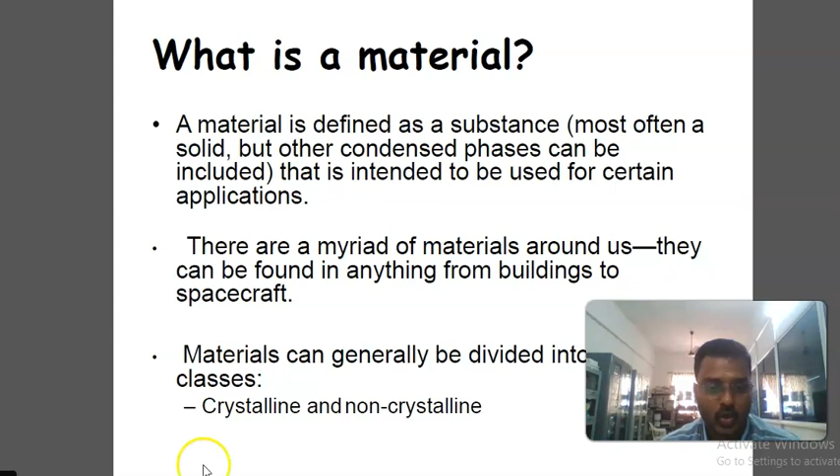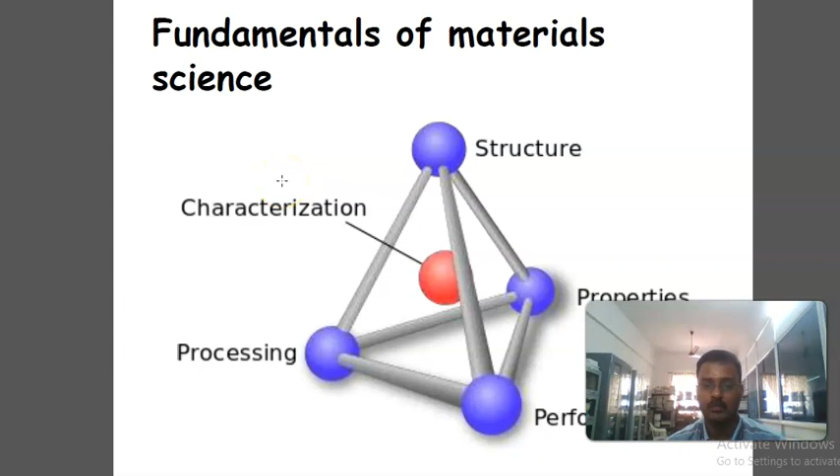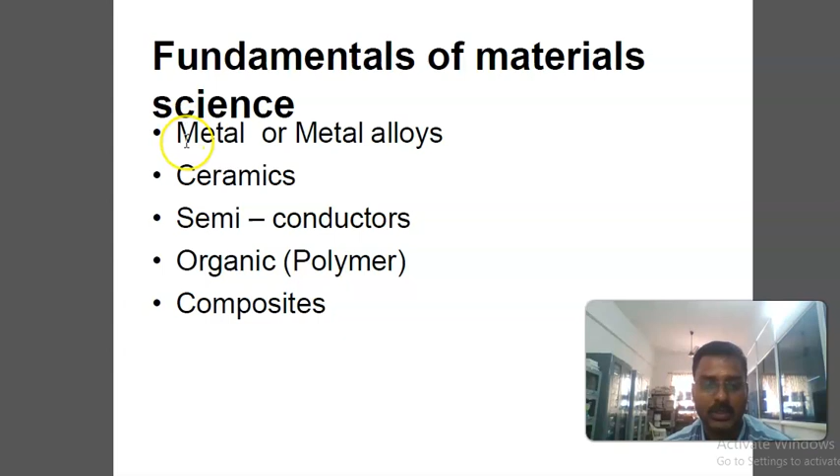Fundamentals of material science include structure, properties, performance, processing, and characterization. These are the fundamentals of materials. The fundamental categories of material science are metals or metal alloys, ceramics, semiconductors, organic or polymers, and composites.

Metal or metal alloys: the study of metal alloys is a significant part of material science. Of all the metallic alloys in use today, steel, stainless steel, cast iron, and tool steel alloys make up the largest proportions, both by quantity and commercial value. Iron alloyed with various proportions of carbon gives low, mid, and high carbon steels.

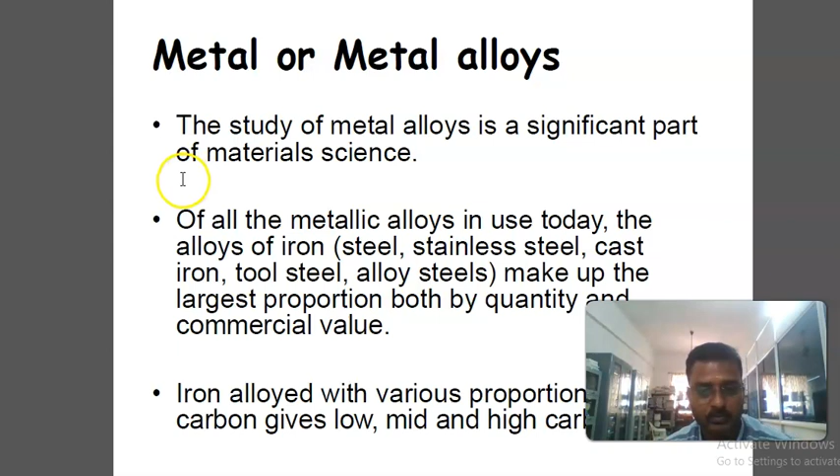An iron-carbon alloy is only considered steel if the carbon level is between 0.01% and 2%. For steels, the hardness and tensile strength are related to the amount of carbon present, with increasing carbon levels leading to lower ductility and toughness. Heat treatment processes such as quenching and tempering can significantly change these properties.

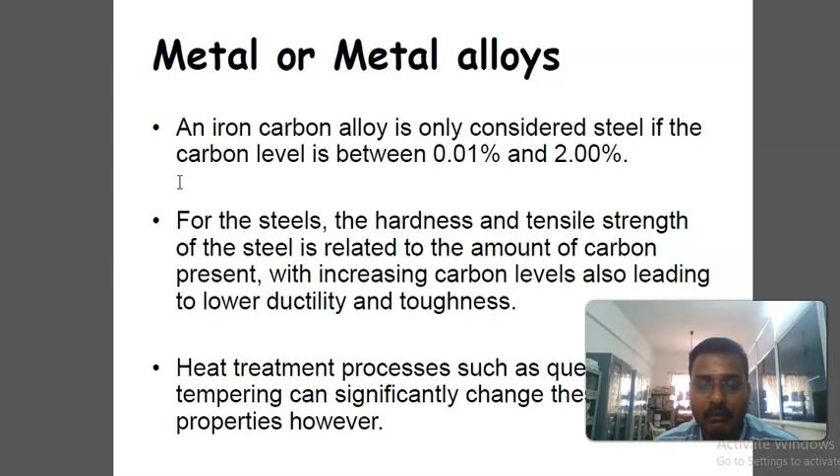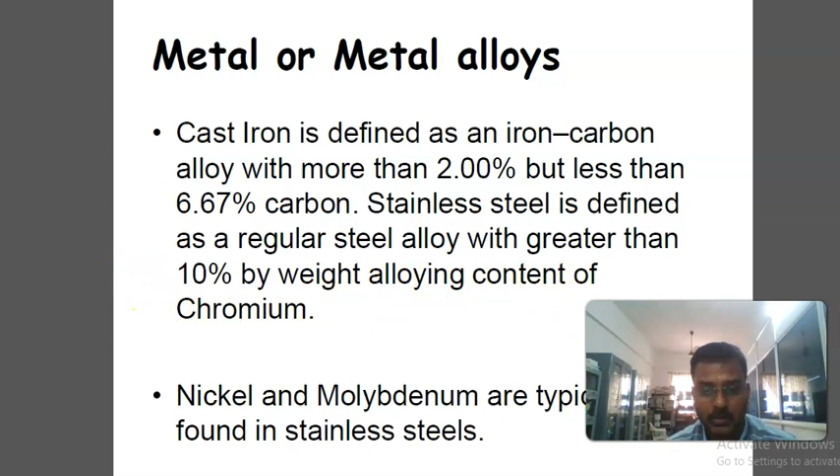This is about metal or metal alloys. Cast iron is defined as an iron-carbon alloy with more than 2% but less than 6.7% carbon. Stainless steel is defined as a regular steel alloy with greater than 10% by weight chromium content. Nickel and molybdenum are typically also found in stainless steel.

These are some of the metal examples. Ceramics are among the most brittle materials. Many have seen ceramics like tiles, wash basins, and many equipments, and also cooking utensils like tumblers and bowls made up of ceramics.

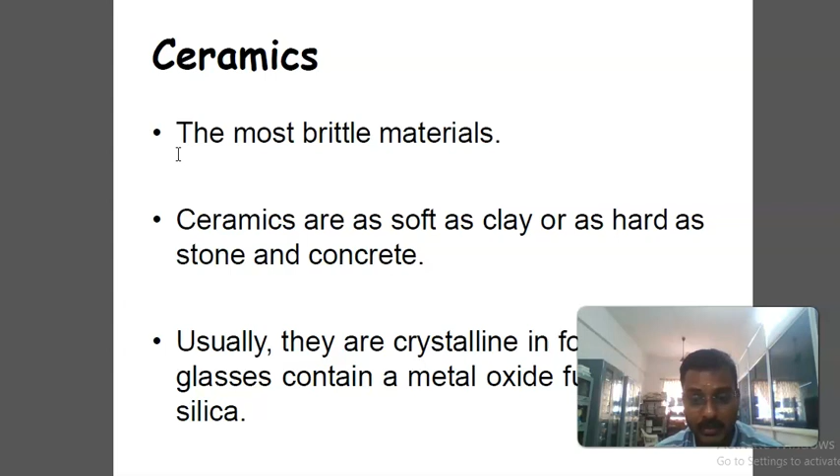Ceramics can be as soft as clay or as hard as stone or concrete. Usually they are in crystalline form. Most glasses contain metal oxide fused with silica. This is about ceramics.

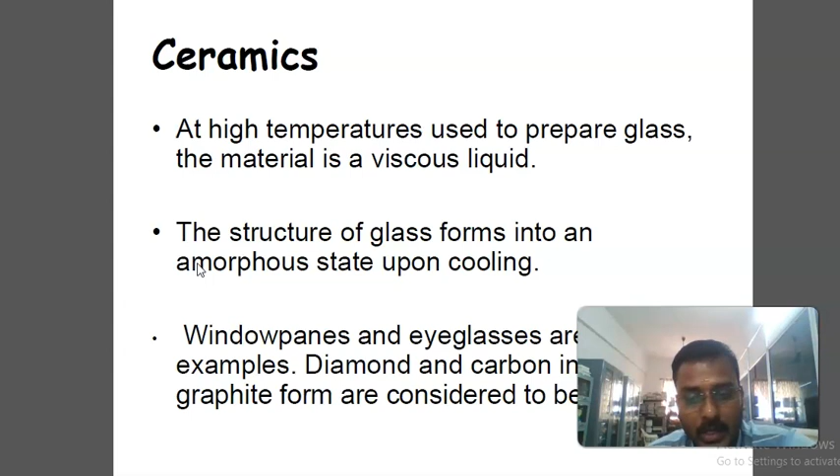At high temperatures used to prepare glasses, the material is a viscous liquid. The structure of glass forms into an amorphous state upon cooling. Window panes and eyeglasses are important examples. Diamond and carbon in its graphite form are also considered to be ceramics.

This is about ceramics. Next is semiconductors. Semiconductor materials have electrical conductivity falling between that of a conductor such as copper and an insulator such as glass. Semiconductors are the foundations of modern electronics.

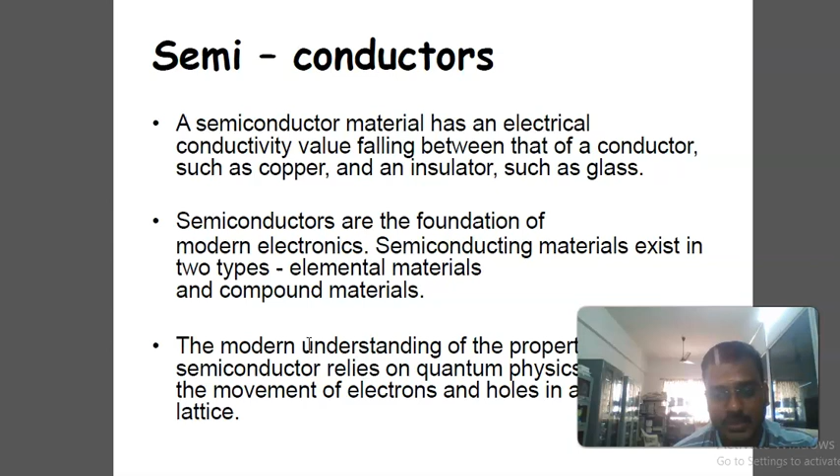Semiconducting materials exist in two types: element material and compound material, where the modern understanding of the properties of semiconductors relies on quantum physics to explain the movement of electrons and holes in a crystal lattice. The unique arrangement of the crystal lattice makes silicon and germanium the most commonly used elements among semiconducting materials.

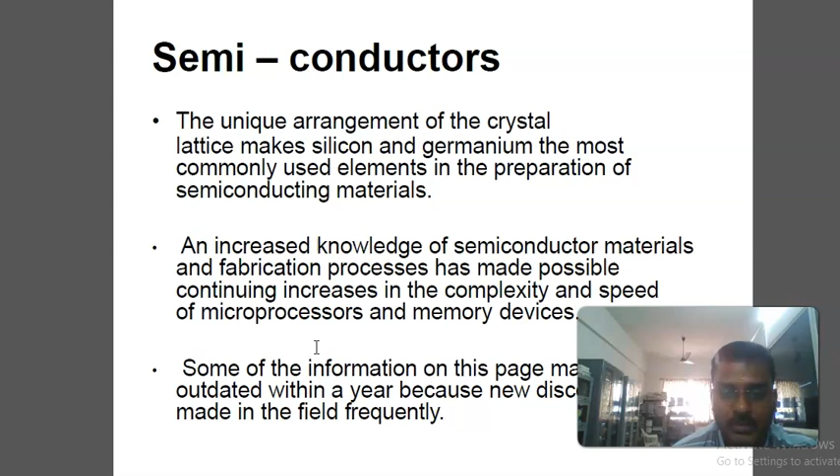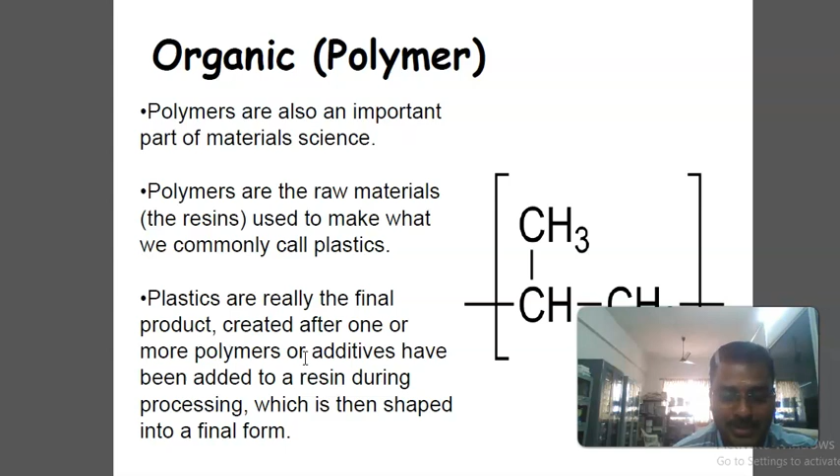Polymers are also a most important part of material science. Polymers are the raw materials, the resins used to make what we call plastics. Plastics are the final product created after one or more polymers or additives have been added to resin during processing.

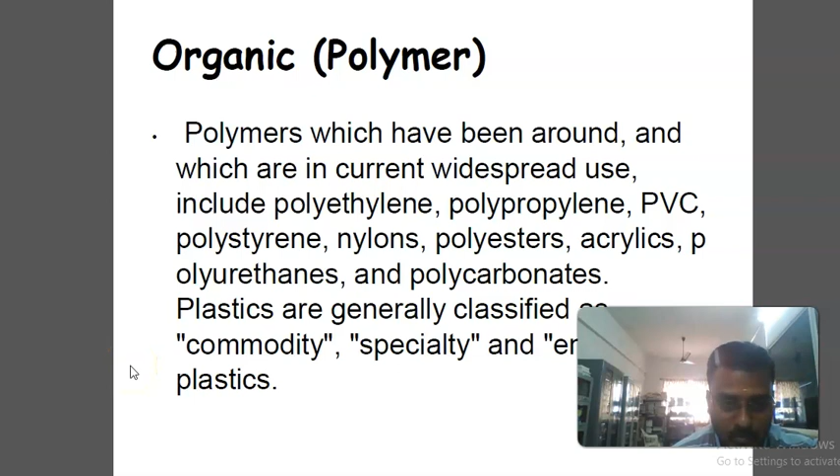Polymers which have been around and in current widespread use include polyethylene, polypropylene, PVC, polystyrene, polyesters, acrylics, polycarbonates, and other plastics. Composite materials are structured materials composed of two or more macroscopic phases.